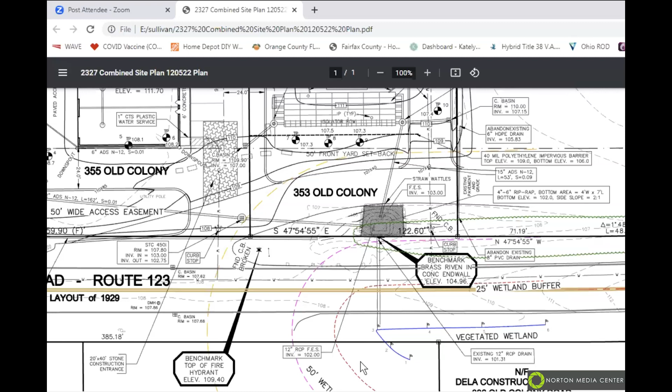Where are we on Route 123? So we're on 123, just beyond the north and south Worcester Street intersection, heading toward Attleboro. You go over the hill and it's to your right. Oh, where the buses are parked? Where the buses were parked, yes, this is the lot where the buses were parked.

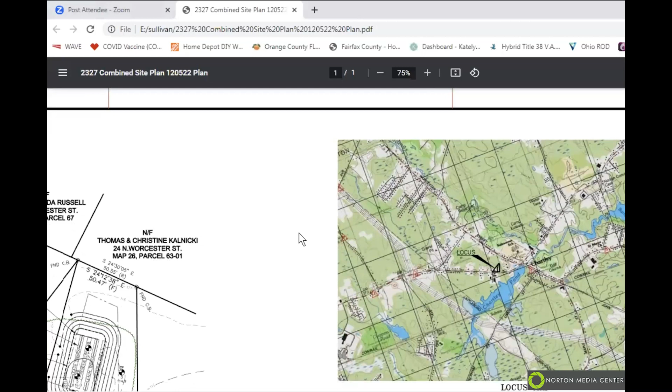And just so the commission understands, for context, this project is being peer reviewed by the planning board, and they have contracted with a stormwater consultant to peer review this project for the planning board. They have actively submitted a stormwater permit to the Stormwater Authority, which I will be reviewing, but I'm just waiting to get the final consensus from the peer review consultant before that permit's issued.

We have not been before a planning board yet. Thank you, Ron. And like Ron said, he has explained the full stormwater management report that we submitted, which is going to be reviewed under the purview of site plan approval with the planning board.

But John, just for clarification, we can close based on this plan since we're not doing the primary stormwater review here, is that correct? That is correct. Yes, all the onus would be on the applicant going through the planning board to make sure they're in compliance with the stormwater regulations.

Well, you might just want to keep it open. If the planning board process and peer review process results in comments that end up revising the site plan, I would suggest leaving it open so you don't have to come back to us. But it's up to you.

Well, as a comment to the applicant's representative, it really wouldn't matter if it stays open since you can't proceed with the project until the planning board signs off anyway. Is that so? Would the representative of the applicant be concerned if we just held in abeyance for a little bit?

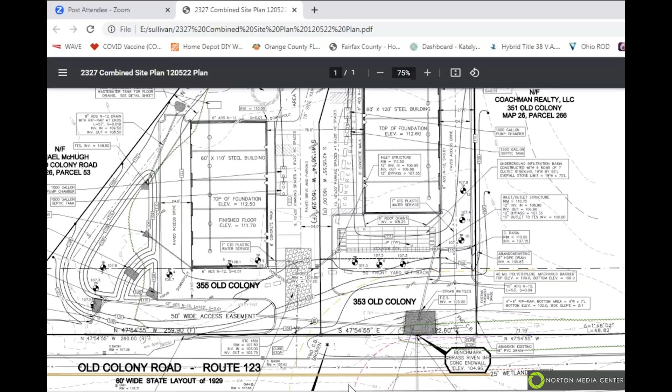I had a quick question. I was looking at the storm water management section, and this may not be in our purview, but I thought it said it was done in development with Easton's stormwater regulations on the objective, on page 3.

I'm guessing that's an oversight. Okay, that's all right, a find and replace can easily fix that. My apologies, no worries. I just wanted to make sure.

You wanted to make sure Easton hadn't held a revolution somewhere. And you just never know. True.

All right, if there are no further questions on this, I think we can entertain a motion for continuation of this hearing. Your planning board appointment is soon, is that correct? Yes sir, that is next Tuesday night. So if we schedule you for our next meeting, which is the 23rd of this month, presumably we'll have enough information to just close and go with that.

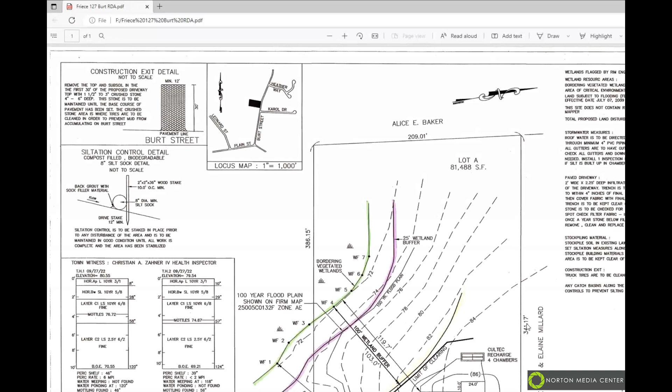Good evening, this is Craig Skanowski, RIM Engineering, representing the applicant and now the owner of the property, Bill Friece. So I can share screen. Where's it at? You all see that? We do, I do, okay.

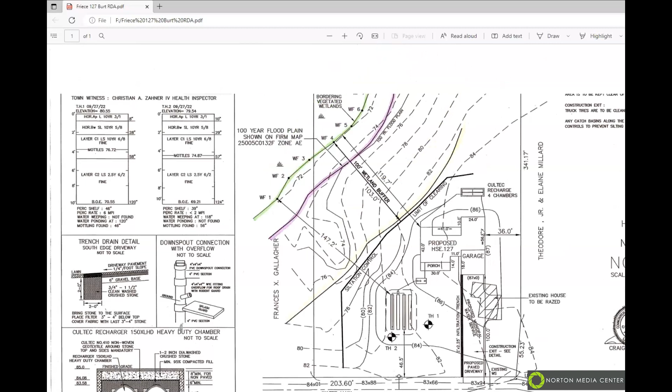So 127 Burt Street is an existing wooded property that was originally owned by the people to the east, the Millards, who broke out this lot back in the 80s. There's a small 720 square foot structure sitting just off, in a lawn area next to their property, that's to be razed, and we're proposing to construct this house for Mr. Friece. We flagged the wetlands here, the bordering vegetated wetlands.

We have a 100-foot buffer zone. There's also a 100-year floodplain that runs around 74.5 down on the slope here, following this bubble in the contouring. So our closest point of construction is 103 feet, which would be the limit of clearing, and our proposed house corner would be 119.7.

We did have an approved perk witnessed by the Board of Health agents, so we have a septic system designed 147 feet from BVW with the grading at about 110 feet. Assuming that the wetlands line was approved as shown, we're just asking for a request for determination of applicability, negative determination. Do you have any questions?

I should say for the roof water, we're putting it into Cultec chambers behind the house. And then along the driveway, we're directing the runoff into an infiltration trench that'll run on the westerly side, so we'll pitch it from the east to the west into a stone-lined trench.

Well, so by your illustration, pretty much all the construction is out of the buffer zone, and the only thing is your limit of clearing seems to bump right up against it, and that's it. Is that right? Yeah, we're about 103 feet from the wetlands with our limit of clearing, assuming that John approved the wetlands flags, then that's where we would be.

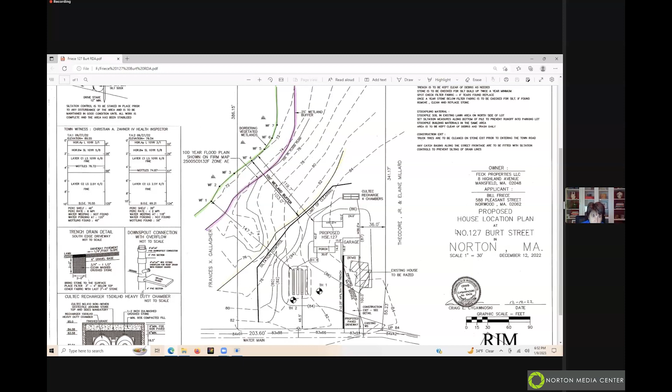Questions from anybody? Craig, I just had a quick question relative to the flood zone elevation. Is there a note on your plan that references the elevation? If not, I have no problem with it, if you can just add it to the call out. There is a line there labeled the 100-year.

Yeah, but typically, when you have an AE with this elevation assigned to it, you want to write that elevation down instead of somebody trying to guess what it is someday, that's all. So I guess the suggestion would be that the item addressed in the notes section say land subject to flooding, FEMA zone AE. I would put in elevation, parentheses, elevation.

74.5. I mean, it is an RDA, so we want to make sure that that's clear. Okay, thank you.

Any other questions? Seeing or hearing none, I think we can consider a motion to close and then a quick motion possibly for a negative determination. I'll make a motion to close the public hearing for DET file 1131 at 127 Burt Street.

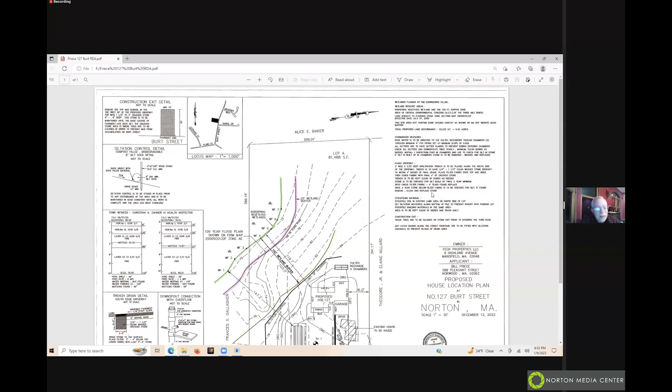Second. Sorry, Dan, you missed again. That was Ron who got the second and Lisa got the first. So roll call vote starting with Ron and Tama, aye. Aye. Mark and Lisa, aye. Dan? Aye. And I'll throw in an aye.

So the motion carries. We're back in our regular meeting. We can entertain a motion for either a negative or, if you think, positive determination. Dan, this is your moment.

I'll make a motion to issue a negative-3, pending the flood zone elevation added to the plan for DET 1131. A motion for negative-3 with the suggested modifications, seconded by... second. I think, well, all right.

I'm afraid Ron beat you again, Dan. Quite all right. Again, roll call vote starting with Tama and Ron. Aye, aye. And Mark and Lisa, aye, aye. Dan? Aye. And I'll throw in an aye. So the motion carries, negative determination.

Craig, thank you. Thank you. Next item on the agenda is item C, notice of intent, file number 250-1119, 0 South Washington Street. Do we have a representative of that project?

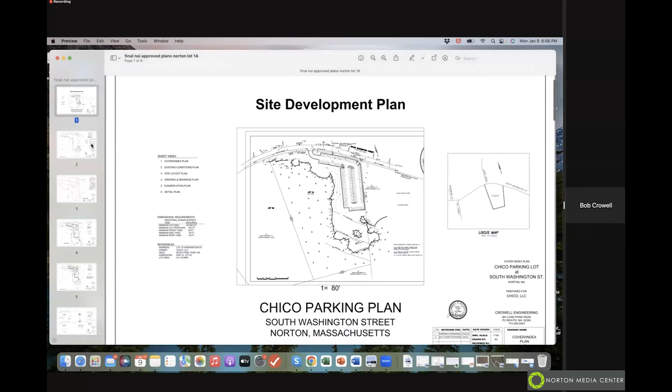It kind of shows the whole lot, it's the eight... okay, there's the existing conditions plan. It shows the wetland line. The lot, the dry area looks like the state of Florida, so on the left, upper left, it looks like the panhandle and then it goes down. Yeah, so that's what we have.

We have a 25-foot no-touch, okay, right, let's see, which is right here. Yeah, so there's a 25-foot no-touch and all of the grading is outside of that area. And we have approximately 150 parking spots. It's going to be a parking lot, and Dave has a contract if it gets approved with Amazon.

The stormwater is handled in two areas. There's three sets of catch basins and they all go to infiltration areas. It's all infiltrated, there's no runoff going into the wetlands. This has gone through the review engineer, Patrick at Amory Engineering, he reviewed it and we're all good. He also looked at the mounding calculations and we're good with that. In the area, it's 78 feet to ledge, so the mounding is not a problem.

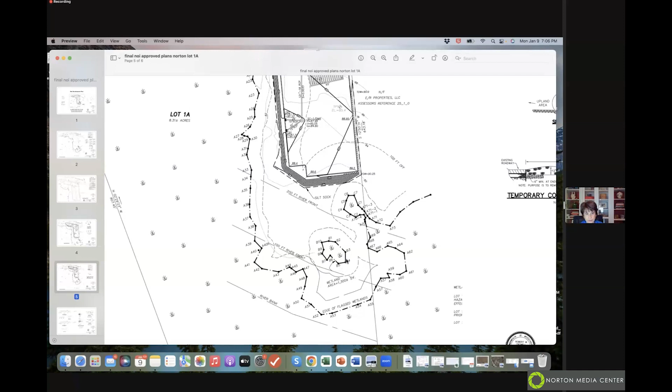I would want to see the river mean annual flag identification locations, and then if you're going to qualify wetland B as an IVW, that's how it should be labeled. Right now it just says wetland area, which doesn't really tell me what it is. Okay, we can make those plan changes.

And then, I assume, I shouldn't assume - is there a flood zone or anything on this site? It's not in a flood zone. And there's a note on existing, let's see.

Somewhere here - we probably should have backed up - but where is this on South Washington Street? There's no context right now. I'm trying to move it so all the people's faces aren't on it. There's the locus.

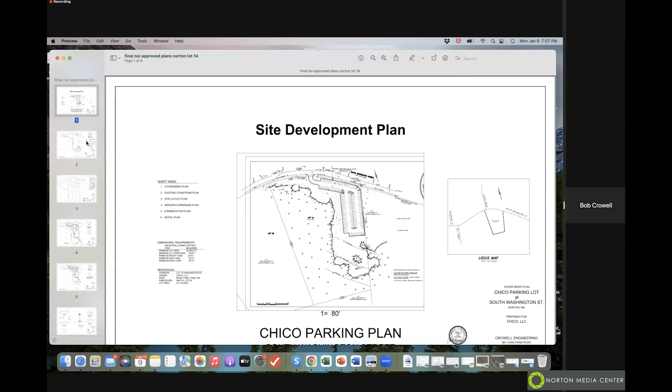The project is opposite of Lopes Drive. Lopes Drive is close to the left here, the left property line. The Lopes Drive label is right where my cursor is. Actually no, it's not - oh, here it is, I'm sorry. It had been mislabeled before, and I changed it. Thank you, that's all I had.

Any other questions from commission members or the audience about this?

I gotta say, whoever's speaking, it's not really understandable. I don't know where the sounds are coming from, but it's not a voice. So this is the computer that has the name Miles Devine attached to it. I'm sorry, you're gonna have to call into the number because your connection is horrible, not working. Sorry, whoever's trying to speak, you need to be on the agenda. If you call into the main line that's on there, there's no way we can hear you the way that you're doing this right now. So I'm gonna either kick you or you have to mute, please. Thank you.

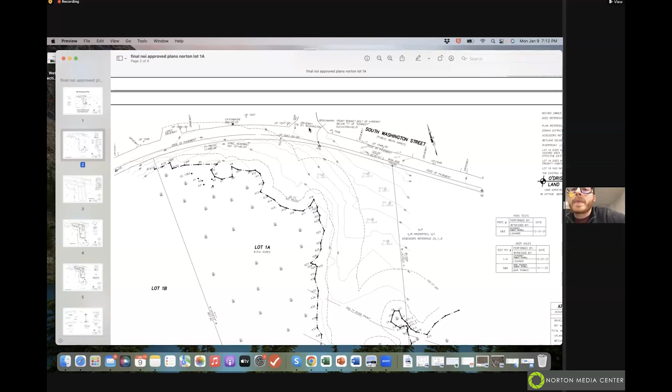Okay, so the entrance to this parking lot is going to be to the right of Lopes Drive, that road that's there. Right here's the entrance. This is 176 South Washington, and Lopes Drive is right here.

Just wanted to make sure of that, because my understanding is that the parking lot is going to be closer to my house than what this plan is showing. And I was also a little confused about where you're moving it - closer to Lopes Drive, or farther away?

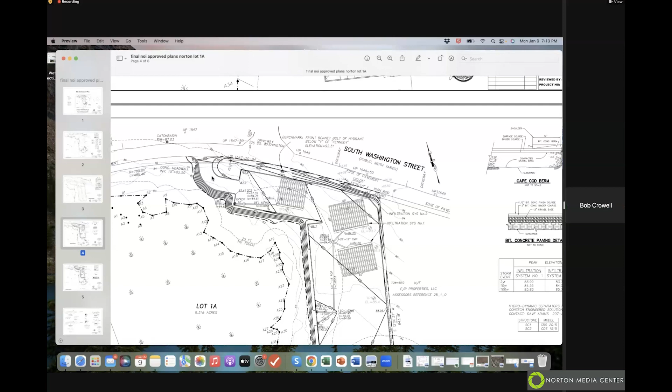No, the entrance is going to stay right where it is. What we're doing is they want a 20-foot landscape buffer, so my plan is just going to be moving down the page. We're moving it, but the entrance doesn't change. Most of the lot stays the same, the lower part doesn't move. All the drainage, the infiltration staying right where it is. We're just shifting around the paved area a little bit.

All right, any other questions? Looks like we have a question from Tracy Del Grosso. Hi, yes, Tracy Del Grosso, I live at 172 South Washington Street. I also had a few questions on these plans.

So if you look at the map, you can see where it says the iron rod is found. If you look at the outer right edge and follow that across the street, that would bring us to where the cemetery is, because I've dug there to plant things and there's that big red iron rod. Just to the left of that is my driveway. And where 176 South Washington is, that's Lopes Drive, legit Lopes Drive. So where the other Lopes Drive is labeled, I feel like that is mismarked.

No, if you change that, Bob, that's the way it is - Lopes Drive is to the left, and to the right is that place with a sign for the cabinet manufacturer. So literally my driveway is like right where the S is in South Washington.

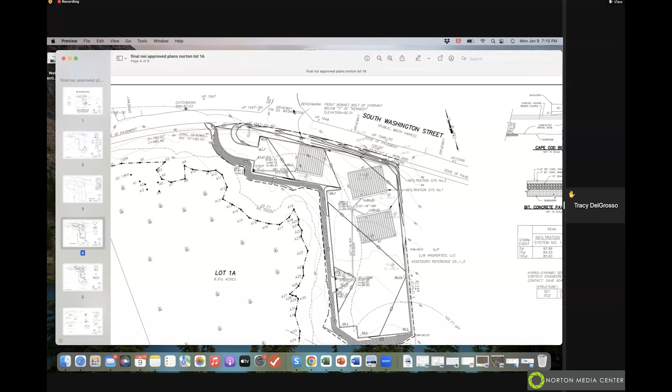So I'm not sure where this other Lopes Drive is labeled, I don't know what house that is. I actually have the assessor's map up. Yeah, that's something to look at. What I'll do is stop your sharing and share my screen, so everybody can see what our assessor's department has. Just give me one second. Can everyone see the screen?

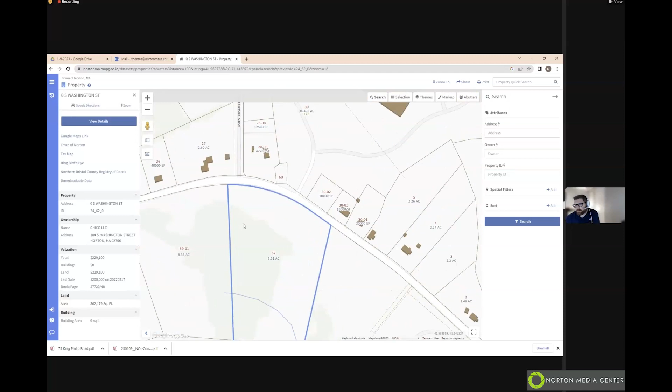Yep, we can. All right, so here's where the applicant is proposing the project. Here's Lopes Drive on the left-hand corner here. Can actually throw on the aerial too to make it easier. This is that huge warehouse project for 176 South Washington. So to give everybody clarity, Lopes Drive is on the furthest left-hand side here, 176 is in the middle, and on the right this property is 180 South Washington Street.

And number 60 is the cemetery, I believe. Which one's the cemetery, Dave? 60, I believe, this one right here. Is that the cemetery? Yes, this is the cemetery, then the town of Norton owns this piece right here. Just to give everybody a little bit more clarity.

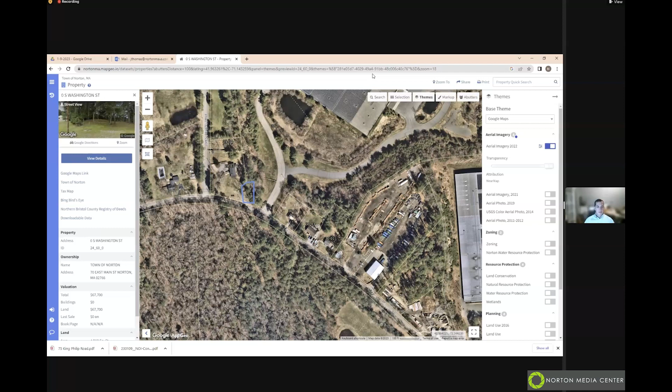Just not to belabor the point, but there are differences between the plans that were included in our packet in terms of what's labeled Lopes Drive and what's not. When did you receive that package? Because we changed this just recently. I'll leave that for John. I'd have to double check to see when the most recent packet was submitted. The most recent plan should be on the drive that the commission got.

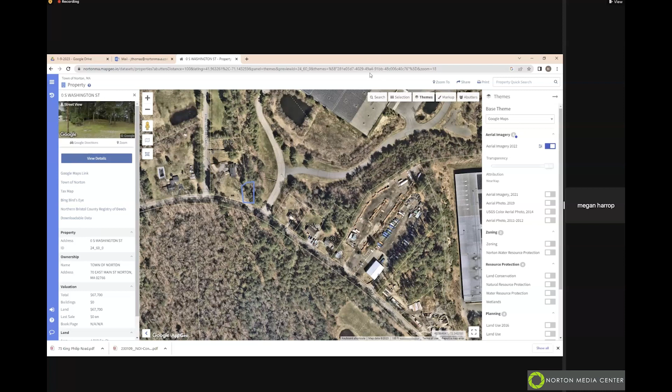The plan I'm looking at is dated 12/5 on the cover page, date issued 12/5. If we had a revision, it was on 12/29.

So it sounds like you guys have fixed it, but double checking might be reasonable. These really don't affect the project itself. Is that a fair statement? Correct.

Yeah, these are all site plan review things that need to be handled with the planning board. So I think they meet next Tuesday, the 17th. Any questions pertaining to the planning board or site plan review, if any abutters are concerned with the design outside of environmental, please feel free to attend that meeting.

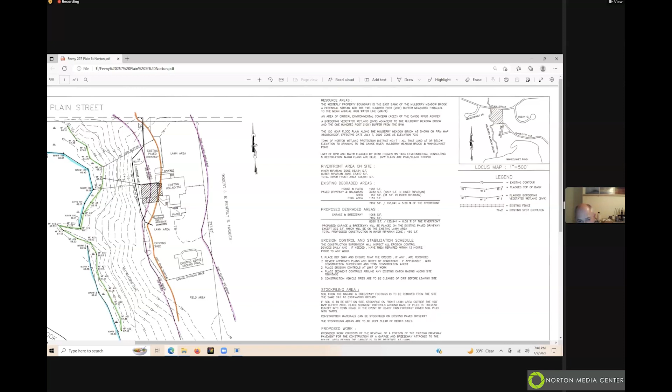Same thing over here. We have the pavement line, the utility pole here, so overhead comes to this and then goes to the house. So along here is minimal grass, and then the rest is heavily wooded, which will not be touched.

There aren't any trees that we're planning to take down. Again, the existing tree line is about 6 to 10 feet west of the existing driveway.

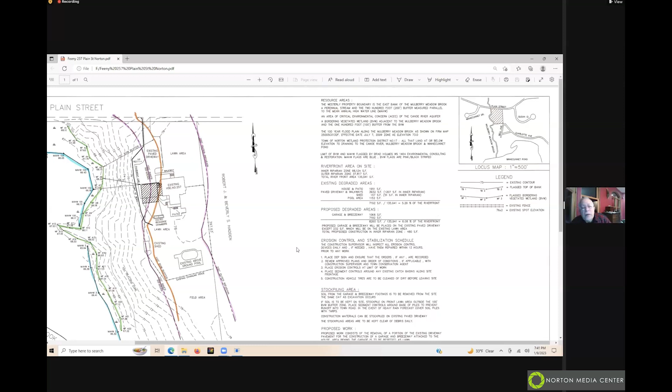Any questions from members of the commission? Any questions from the audience?

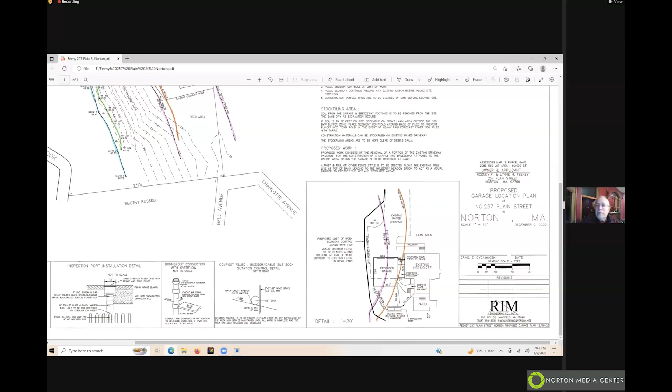It's my understanding that we pretty much have all the information, but John, maybe you can correct me. Is this suitable for closing tonight?

All right, unless there are further questions, I think we can consider a motion to close. I'll make a motion to close the public hearing for file 250-1120 at 257 Plain Street. Second. We have a motion by Lisa, seconded by Tama, to close the public hearing.

Roll call vote beginning with Tama and Mark. Aye. Aye. And Lisa and Dan. Aye. And Ron. Ron, you're up for a vote. Ron is frozen. Looks like Ron isn't hearing us, but I'll throw in my aye, and I guess we'll have to be happy with that.

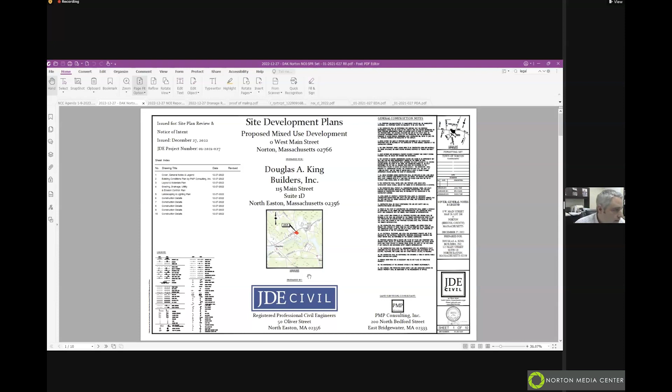All right, so this is 0 West Main Street, Map 21, lot 206. This is the existing conditions plan for the project. If you remember, this site was the same project that we had before you in August last year. I think it was the only live meeting you guys had for an RDA, regarding the drainage ditch right through here, which was determined through the RDA process to be an intermittent stream.

So I'll just go through my presentation here. The applicant, Douglas King Builders, is looking to obtain the necessary land permits to improve this piece of property on West Main Street in Norton.

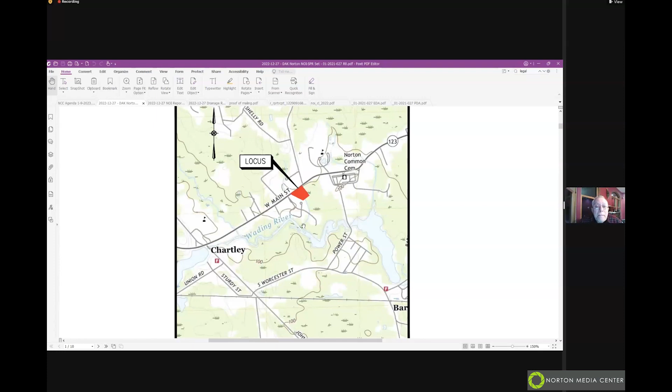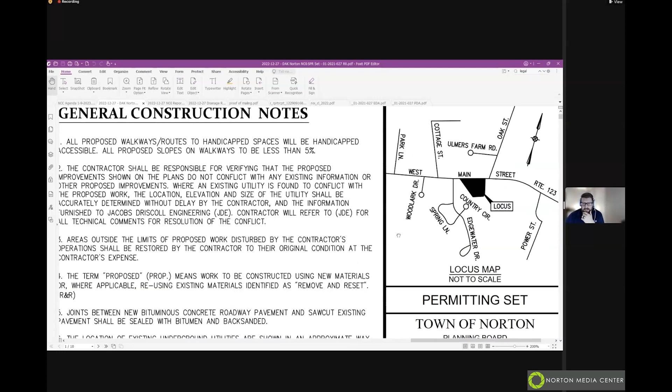They'd like to do... let me just interject. For those who wonder where on West Main Street, if you don't already know, Oak Street is just to the right of this project, where Oak Street meets 123. And I think that will orient people. Yeah. And back behind it are the condos, Edgemere... there we go, this is Edgewater, I think it is. Oak Street's labeled here, and Edgewater Drive. Yeah. All right, very good. Okay.

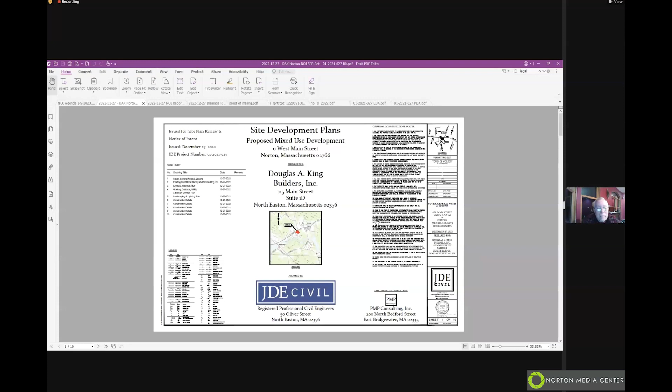All right, so the applicant is looking to construct a mixed-use building on the property. It's going to be a 4,000 square foot building, 2 stories. On the first floor, a dentist office, and on the second floor, 4 apartments. Site's located in the Village Commercial District on the southern side of West Main Street. Surrounding uses include residential homes to the north, west, and southern sides. Church and the middle school are to the east, and also a bank. And the parcel is identified as map 21, lot 206.

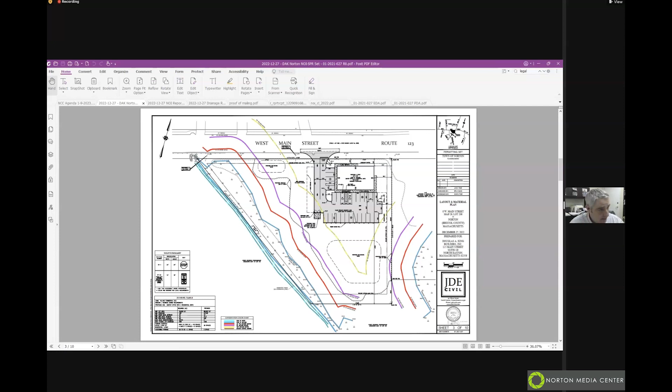So as I noted, the project is for this proposed building right here, 4,000 square feet. There'll be proposed parking to the rear and side, 28 parking spaces as required by zoning. Move on to the drainage plan.

This area over here is reserved for a proposed septic system. We tried to fit it under the parking lot, but it was going to cause us to raise it too much and have too much of a slope coming down through the existing road. So the next step is for us to complete design plans for the septic system and submit that to Board of Health, which we might have to go back out and do more soil testing. But we're aware of that.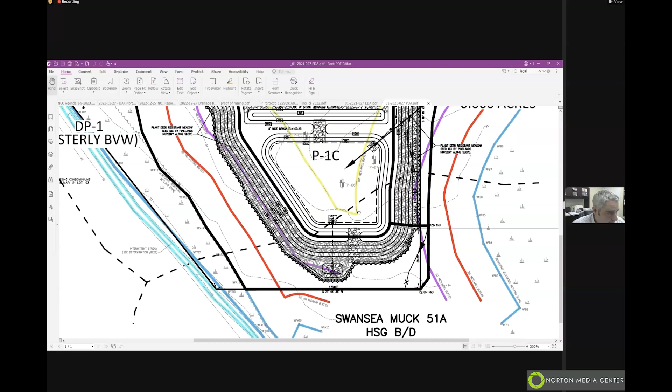The way that this drainage basin is designed, we're infiltrating all the water. This isn't an outlet control structure. This right here is actually a drawdown pipe with a valve in the bank that's normally closed, so it doesn't normally have water flowing through it. That's only for maintenance purposes and emergency spillway. So we are infiltrating all of the water that comes off in this basin as well. Same thing, there's no outlet structure. There is an overflow for emergency spillway. We have 1 foot of freeboard designed to both basins. I believe this one has more than a foot.

So this area that's hatched along here is proposed to be, it's called out on here, a deer-resistant meadow seed mix. So what happens with soils that are too good, sandy soils and A soils, even if we're not paving this area, it's just grading from the basin down. And if it was to be lawn, that's enough of a change in cover type that would increase the runoff. So we're looking to replicate the type of runoff characteristics of the existing wooded area by planting this meadow mix along the outer edge of the stormwater basin up to about this point.

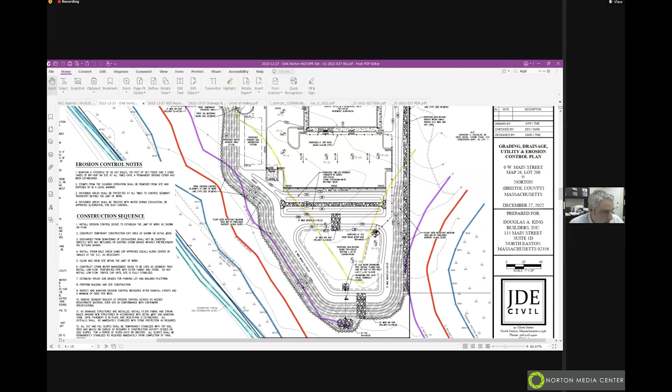Also forgot to mention there is a sod strip and a flush curb along here to make sure that the edge of the pavement doesn't get broken off or anything. So there's a concrete curb set flush and then a 5 foot wide sod strip prior to the 2 sediment forebays in series. We're also putting the roof drains under the ground and discharging those directly into the basin here, and again, this is all going to infiltrate into the ground.

And then we have public utilities coming, the water's coming through here and the gas and electric will come off of the pole on the side of the street. So we also have a construction entrance proposed, or construction exit, to make sure no sediment is tracked out onto the road during construction. We're also showing a dewatering area and temporary stockpile areas outside of the 100 foot buffer.

That is the overview of the project.

John, if you had anything, or... Yeah, I just want to inform the commission that we did retain a peer review consultant for this, for the stormwater, so they'll be looking at that. And they'll probably have some comments pertaining to the basin that's closest to that potential vernal pool, so there may need to be some tweaks made in anticipation of that. So, you know, that was something that we had a discussion about after all this work was done that Greg generated. So there will probably be some refinements that they'll come back with, along with the peer reviewer's comments.

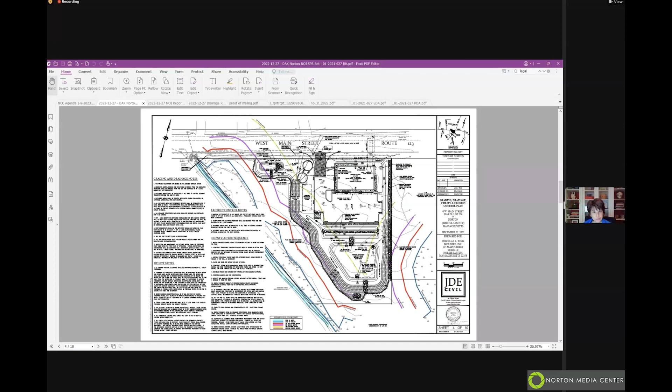So I just have a couple of questions. What are you using for sediment controls along the perimeter? For the paved area, this is all going to run overland into these two sediment forebays.

No, I'm sorry, I'm talking construction term, sediment control. Oh, I'm sorry, yeah. So it looks like you may have, well, it should be proposed sediment control. So it looks like a filter mitt. Yes, are you showing a compost filled filter sock? Yep.

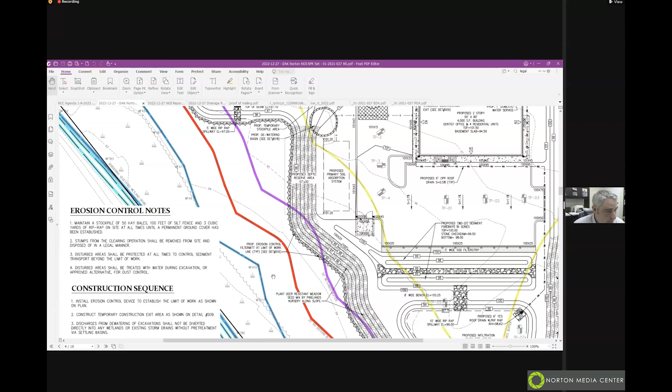So the first note under your erosion controls talks about hay bales. If you could please strike hay bales from every note and every detail—straw bales too—they're no longer allowed. I just want to make sure those aren't introduced, and I assume you have a detail of that filter mitt somewhere? I do.

This is it—it's a compost filled filter sock. Okay, that's sediment control, by the way, just so you know. Not erosion control, but you might want to fix your detail.

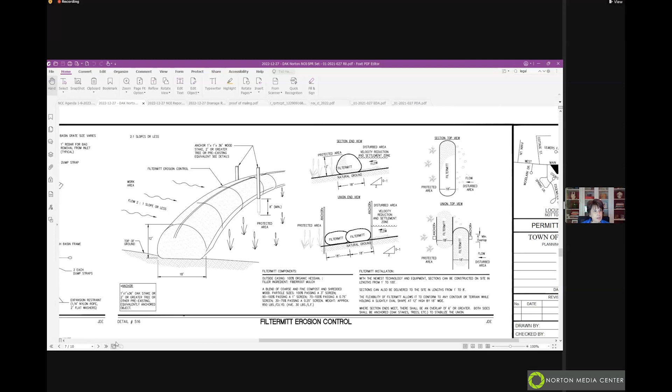The next question I had was a general question about Pond 1A, if we could go back to that. Is there any reason—I mean it's 90 degrees to the street—but is there any reason you couldn't put it at 45 degrees and not cut into the buffer so much?

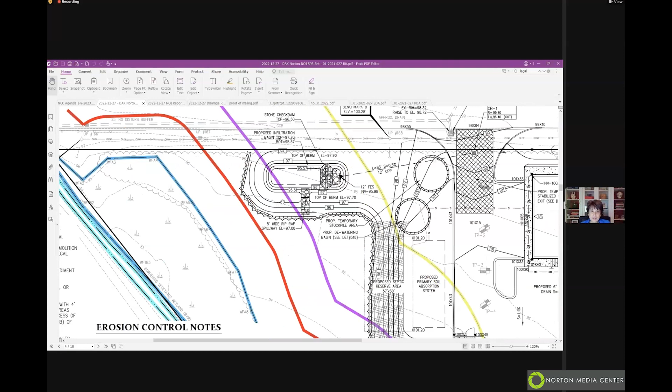So if you go to the grading plan for a second. Yep, yeah, oh I see what you're saying—rotate it out, try to get it out of the 50. Yeah, I know the engineers like everything at 90 degrees, but sometimes you can think outside the box and say how does this fit with the landscape a little better in the topo, which would be 45 degrees almost.

Now, if there's an issue with distance from your soil absorption system, that's another issue, but I don't know. Yeah, now that you mentioned that, I kind of have it—it's going to have to come out 50 feet from the wetland regardless to meet the stormwater handbook standards. So that's just a comment the peer reviewer is probably going to put on there. Okay.

I think that was all I had, you know, as long as this is being peer reviewed for stormwater. I had the same concerns about the PVP, even though there's not a direct point source, but for somebody to look at the standards. That's all I had, thank you.

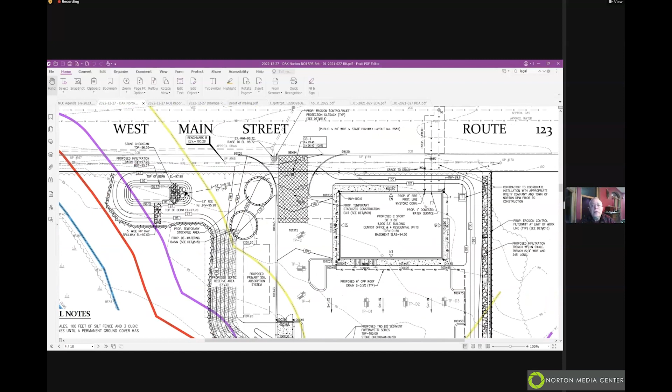All right, anyone else on the commission have comments or questions? If not, we can go—Kelly Murphy, did you have a comment? Freddie Bay, Annie Schuster as well? So Kelly, you put your hand up quickly—I see it's down now, again.

Thank you, I just had a couple of questions I wanted to clarify. It looks like the total buffer has three different buffer zones—a 25, a 50, and a 100. I just wanted to confirm that was correct, and then I was curious, so that would be a total of 175 feet of buffer zone.

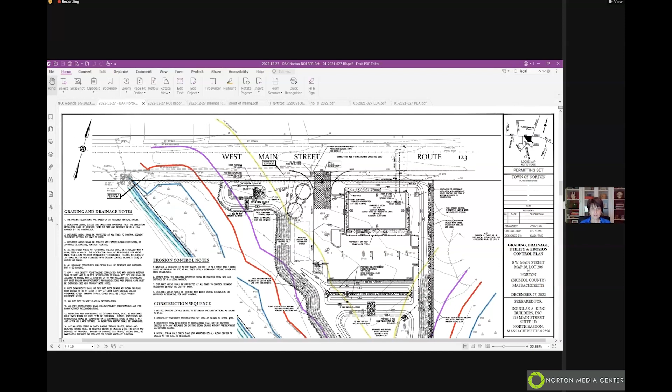There's really no 50 foot, I don't know where that's coming from. So the 50 foot's there for compliance with the stormwater handbook.

So there are three buffer zones that total 175. No, there's a 100-foot buffer zone, and then there's some interior buffer zones, and these all originate from where the wetlands are delineated.

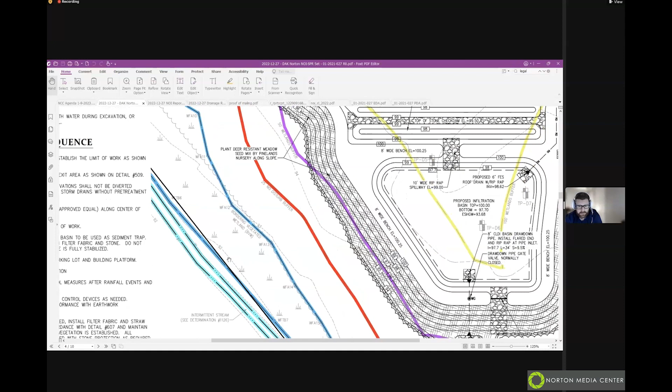You'll see flag numbers that say WF dash with a number. Those are where the mapped resource areas for the wetlands are associated with that drainage ditch, and you derive a horizontal buffer outwards from there, and that goes 25, 50, and 100. The jurisdiction of the Conservation Commission is within 100 feet of that mapped wetland.

So the buffer between that property line - I didn't identify myself, I'm a trustee for the River Crossing condominiums, part of the Edgewater Drive, Spring Lane area. I'm thinking the water line is sort of the property line, I think it goes down where that little river is. Yeah, the stream and drainage way meanders the property line from what I recall.

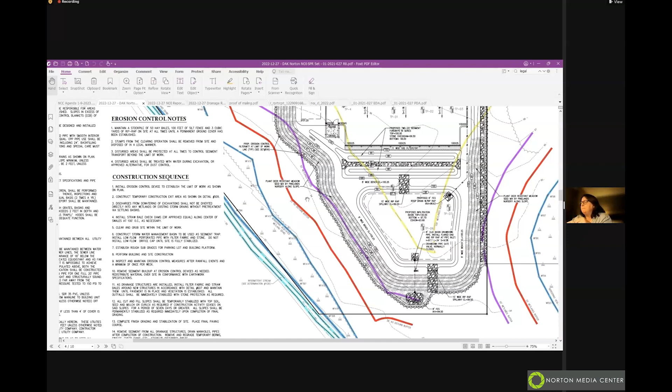So there's about a 100-foot buffer between our property lines because of the natural water line? If that's what you want to say, then there would be a 100-foot buffer in either direction - towards the Edgewater development, and towards this project.

And then the basin, I don't know how deep it's going to be and if there's going to be any kind of railing around it for safety? It's not required. That's a no? No, unless the commission may require it, but as far as stormwater management goes and the Wetlands Protection Act, it's not required. And how deep is it? It is just over 2 feet.

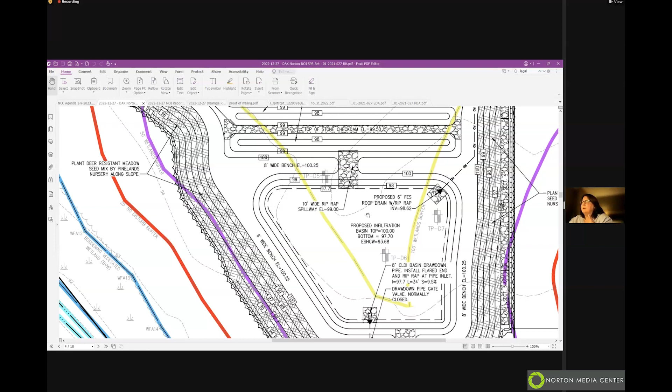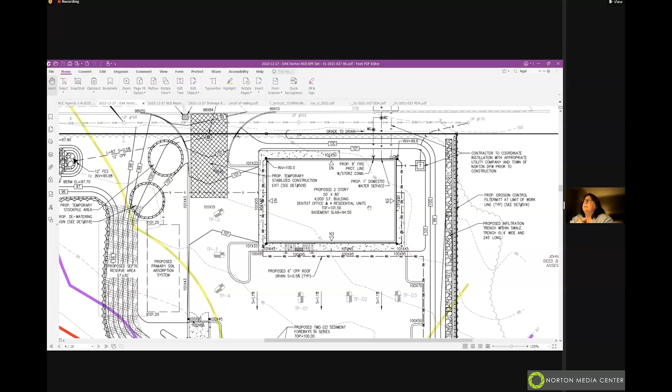Can you also expand a little bit on the use of the building? I see that it says dentist office. So when it says mixed use, is it only one tenant type thing? Is it a dentist office and something else, or is it just one thing? It's going to be a dentist office on the first floor, and then 4 residential units on the second floor. Okay. And is the dentist office a done deal, or could it turn into something else?

They have an agreement on the land, subject to getting the permits. Okay, that's all I have. Thank you, all right, very good.

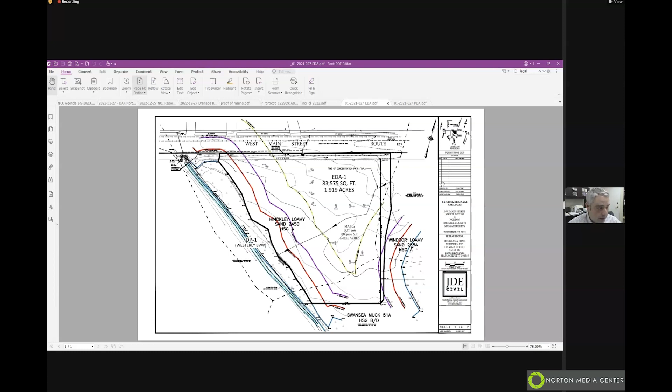One of those is that we need to study the site, and these are the existing drainage areas, so I delineate these areas and run a hydraulic model on this property the way it is currently. And that's the set number for the future development. So I can't send any more water off the site than currently comes off of it today. A lot of times we end up reducing the amount of water that comes off of a site, and that's what we're doing in this situation.

Well, that could be equally as dangerous, for the poor little critters that live in that water.

We are surrounded by water here and we love it. But my other question is, is this whole property going to be clear cut? Are our neighbors going to be looking at a big commercial building from their back porches? Or are you going to leave a row of trees or replant some trees to create some kind of buffer?

Yeah, so the limit of clearing is this tree line that's right in here as proposed. We can't clear past this 25-foot no-touch line that is required per the local Norton requirements. But we're not going that far in most cases, right up through here. And we will revegetate this with some meadow mix type plantings.

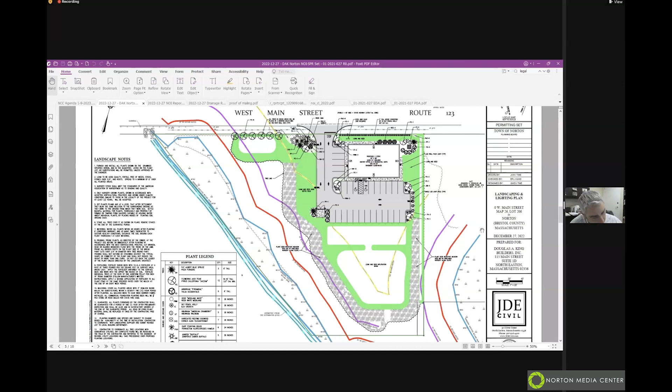What does that mean, meadow, like deer resistant meadow mix? It's a seed mixture, included in the drainage report, of different plant types that grow and create a meadow. It's not meant to be mowed, it'll just grow wild. And there's a list of the plants included in that mix within the stormwater management report.

That's public information. You can get a copy from the Conservation Commission office. And we're also proposing all this landscaping as shown on this plan here. That'll be discussed in further detail when we go to the planning board for site plan approval.

Okay, yeah, because we do have a lot of wildlife in our neighborhood, like walking right in the streets. So we just kind of want to make sure that they're not displaced. Yeah. Thank you. You're welcome.

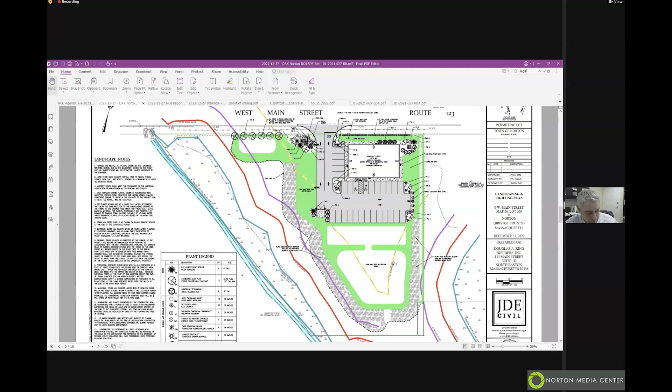All right, I don't know. Anyone else have a question? I think Freddie Fay Moskowitz had a question. Yes, hi, thank you. You go ahead. Thank you, Edgewater Drive.

I wondered about the parking lot and the lighting. How tall and how often will it be on? Can you talk about the planning board issue? Yes, so that is going to be a planning board issue. Now Greg, I believe you guys are going to be going in front of the planning board, is that correct? Yes, we have to go in front of planning for site plan review.

So when are you planning to go, next Tuesday? Is that the intent? We haven't filed with them yet. We want to get through at least a peer review with you guys to see what might need to be revised, and then bring a revised plan to both your commission and planning board on the next go around.

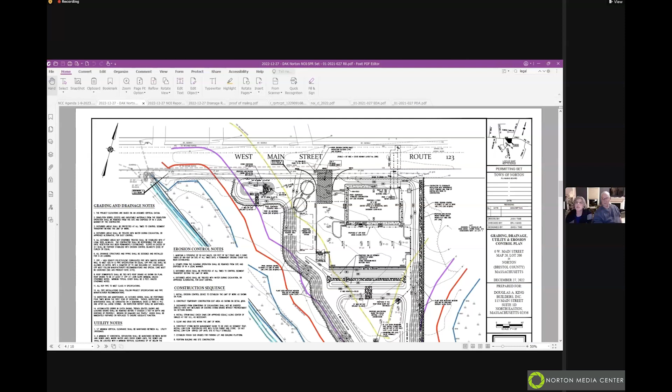But briefly, we will have a lighting design prepared by a lighting vendor, and typically there is required zero light pollution or spillover at the property line. So I don't expect that the parking lot out towards your development will be lit. We're not going to light up the stormwater basin or anything. That's going to be an area that's going to be kept dark.

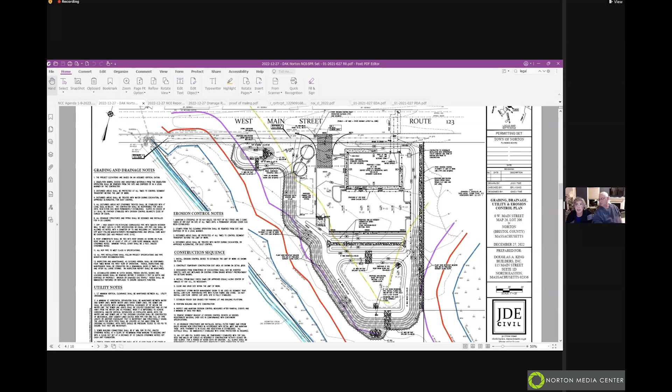And just about trees, you said you weren't cutting any trees down, correct? Well, we will have to clear the area for the proposed development. So, trees being very important for the environment, and we already have some, I wouldn't say flooding, but overflow of water in our development.

Is there any chance for a tree for tree, or maybe 2 trees for 1, to give back? It wouldn't have to be in this area, it could be anywhere in Norton, but to consider the trees. Is that a planning board issue? The town doesn't currently have those stipulations or regulations. Other towns may, but I'm just talking about doing right, and the National Audubon Society actually funds planting of trees and helps pay for this.

I would address that with the planning board. Okay, thank you. You're welcome. Thank you very much.

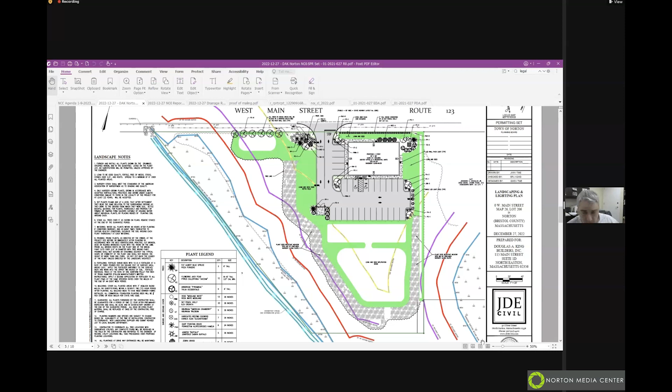All right, so I think we can consider a motion for continuing this, and our next meeting is the 23rd. I'm assuming, Greg, that that's acceptable. I know everything may not be wrapped up by then, but yeah, we'll continue to the 23rd, and if we need more time, we can always ask for a continuance. All right, very good, so looking for a motion for continuation.

I'll make a motion to continue the public hearing for 0 West Main Street, map 28, parcel 206, to January 23rd public hearing. Motion made by Lisa and seconded by Dan. Roll call vote, starting with Ron and Lisa. Aye. Aye. Mark and Tama. Aye. Aye. And Dan. Aye. And I'll throw in an aye, so the motion carries.

I'm assuming we'll see you on the 23rd, Greg. Thank you. Thank you. Have a good night, everyone. You bet. Aye.

Next item, that completes our new hearings. Next item is file number 250-1105, notice of intent, Pine Street cluster.

So we have a representative for the applicant. Yes, Claire Hogeboom with LEC Environmental Consultants representing the applicant.

So maybe you could just quickly summarize what was outstanding. I know there were a couple of reviews that had to be completed, but maybe you can help bring us up to date. Sure, I'll share my screen. I have the revised plans up on my screen.

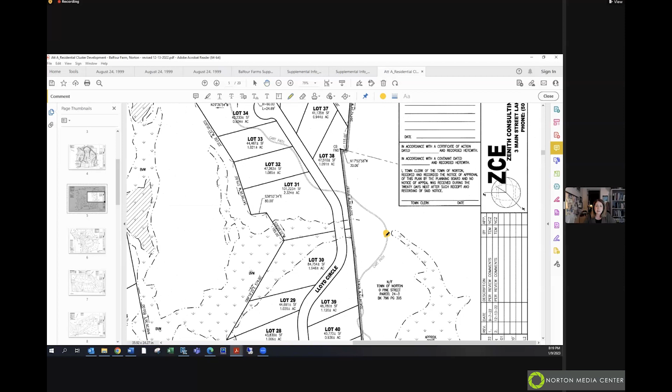I believe John had mentioned it was from around 1919 or 1914, something along those lines. It's a pretty old culvert, and at this point it's elevated vertically above where the stream bed or wetland bed would be. It's clearly undersized.

One consideration might be, and we'll leave this to the commission's discretion, to have the applicant assist the town—again dependent on whether the town wishes to do this—in perhaps designing and replacing this culvert with something more open that would allow for more free flow through this area. I believe that's really up to the commission and the town for discussion, but that was one of the other mitigating measures we thought we found.

If the commission chose to go that route, our recommendation would be that it be a separate filing altogether, perhaps linked by DEP file number to this project, and have this project linked to that potential project in an administrative record-keeping manner, but otherwise be a separate project. I think that's about it for me, so I can turn it back to the commission for questions and comments.

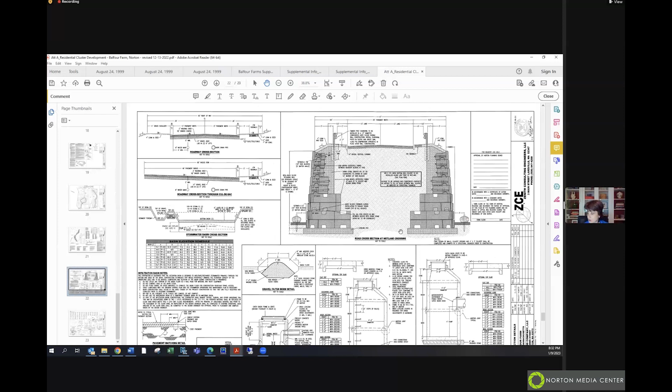I just had one other quick comment. I noticed on the box culvert design, it said to be designed by a structural. So John Thomas, we just want to probably include a condition that says that the structural will provide those plans for our files. Okay, definitely do that. Okay, yeah, that makes sense to me.

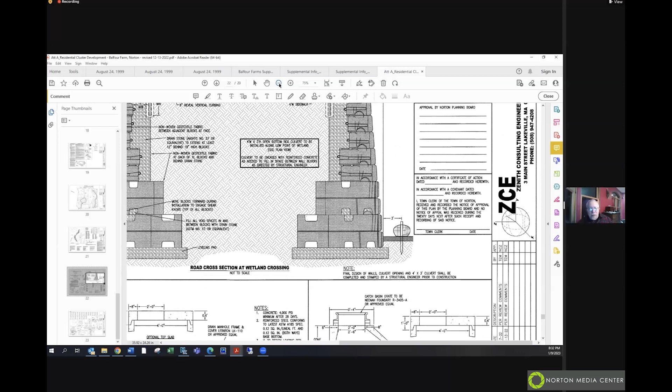That's all I had. All right, if there are no further questions, it brings us to the question of whether we're at the point with this to close. I'm gonna, it looks like we do have a couple of questions up here though. So why don't I deal with that, and then John, maybe you can consider advising me on that. So we have Ellen Turner, or a computer named Ellen Turner, with their hand up. So why don't you go ahead?

Hi, this is Fran Turner, actually, 145 Pine Street. I just wanted to add some perspective to the conversation about the water flow through that 12-inch pipe. I live at 145, so we've got some of the water that flows. I actually wasn't aware of this until fairly recently. That water that flows through the 12-inch pipe that's going to go through the box culvert, ultimately, if I'm correct, ends up at the water area around 148 and then ultimately goes under the road and then by 145 Pine Street where we live. Just for perspective, over the last bunch of years, during the summer, the water gets very low. And frankly, I hadn't had a chance to kind of get out into the woods around there to understand why it is.

It seems like the root cause might be that 12-inch pipe that we're now talking about. I took a walk out there with one of my neighbors a little while ago, and I realized that clearly, if the water flow is through that 12-inch pipe, along across the trail, and then through this property, and ultimately that sounds like it could well be the root cause of the water getting very low over the course of the summer. And again, what happens is the water on the 148 side gets below the level of, whatever the level of the, I don't know what you call it, but the level of the water allowing it to flow under the road. And then our side, 145, goes down by quite a way once the water stops flowing in.

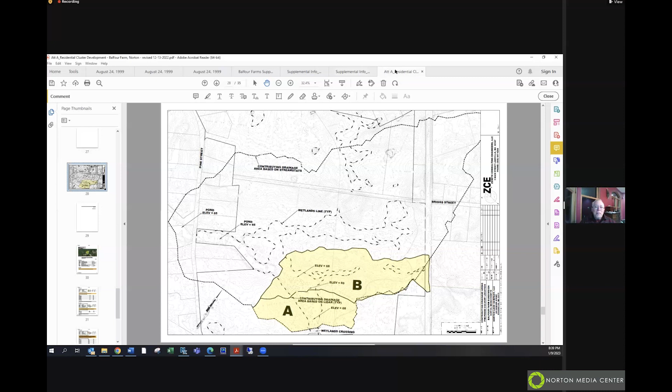But you're raising a very prickly issue, and that is, first, you don't necessarily have the right to prevent a landowner from doing what they wish with their land if it's consistent with all of the local regulations. And it's kind of like a thorny problem, because you're basically saying okay, we're going to deny people the opportunity that you've already had a chance to take advantage of, and that becomes an equality and a civil rights issue. And it's certainly not in the Wetlands Protection Act, so we can't do anything other than comment on it. But you've got to start with the legislature if you're going to make that happen. I don't know if that helps.

My position doesn't change, I would still be opposed. No, I understand, but I'm sure your position is generated from wanting the best for the town of Norton. That's right. Everybody has to have the same opportunity, and it's a very difficult and very complex discussion when you talk about stopping development. It's beyond my knowledge base, so I'll put it that way. No, I'm not saying stopping the development, although I know the folks would like that to happen, but I'm just saying they're talking about having them participate in the cost to fix it, that's all. Okay, well at the very least, that's probably a planning board discussion.

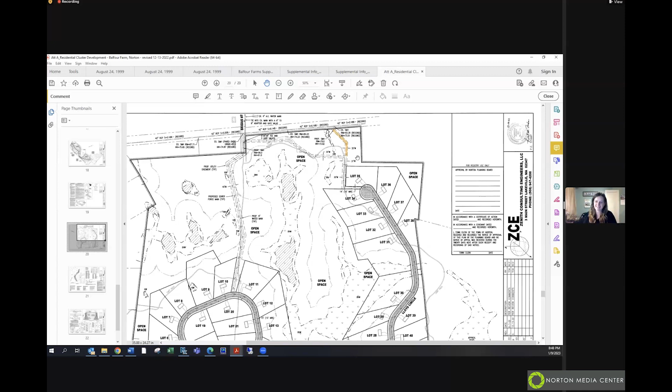Mr. Chairman, if I may, but we just have circumstance. Did you find anything? I just skimmed through Janet's letter from December 22nd. It sounds like all outstanding items from her stormwater peer review have been addressed, and there's no further comment at this point.

So I think a motion is in order? Maybe the bottom line is the commission feels comfortable closing this one because it's already been before planning and things are pretty settled. We're not going to see a change in position of the road, et cetera. So sure, I think we can entertain a motion to close.

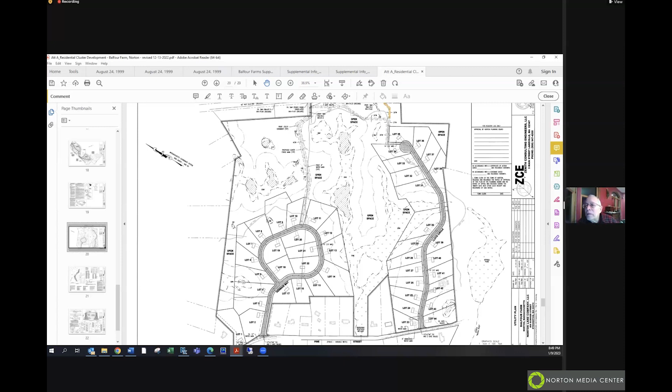I'll make a motion to close the public hearing for file 250-1105. I'll second. We have a motion made by Lisa and seconded by Tama for closing this public hearing. Roll call vote: Ron, aye. Tama, aye. Mark, aye. Lisa, aye. Dan, aye. I'll throw in an aye. So the motion carries. This hearing is closed, and John will have a great time producing an order of conditions for next time.

Thank you. Thank you all. I've already started working on it just to keep everybody in the loop. Well, we'll miss seeing you, Claire. I know, I'll miss you guys too. Thank you so much for a wonderful review. And Amy, I appreciate all your work on this, you did a great job with the peer review. Tom, John, same to you, it was really great to work through all these things with you. Appreciate everybody's time. Thank you.

All right, our next item on the agenda is 0 King Philip Road. Thank you guys for being patient, things have gone on and on tonight. Who's going to be speaking, is it Chris?

Yes, go ahead. Good evening. For the record, my name is Chris Lucas with Lucas Environmental, professional and certified wetland scientist and registered professional soil scientist. Hope you all had a great New Year and holiday. It's good to see you again. Hopefully we can wrap this up this evening.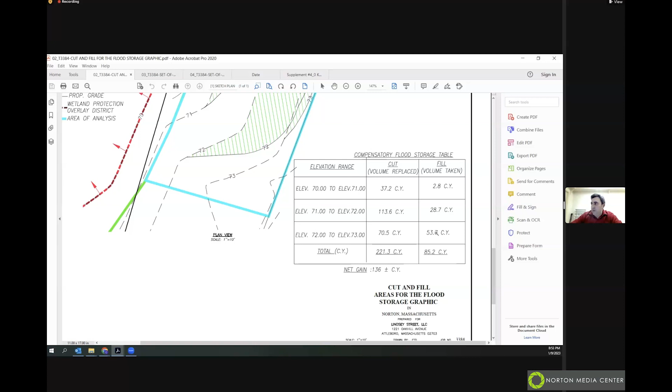We also have a nice graphic here so you can all see it visually. And the Advanced Concepts calculations and whatnot were provided with that letter.

Furthermore, I think this was a big concern from the commission. The basement was removed. There's no more basement associated with this house.

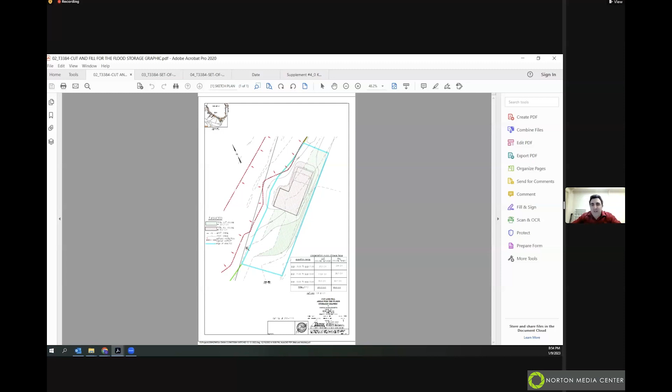What they've done now is proposed a 4 foot crawl space. This is FEMA compliant. Crawl spaces are allowed under structures as long as one side is at grade. And what we have done here is the back side, this entire back portion of the crawl space will be at final grade, so we are FEMA compliant with that.

So we're no longer using the house for compensatory storage as was requested. That graphic shows all the areas. We fully comply with it. And this cross section shows the crawl space now instead of a basement.

The only adjustment required, because we adjusted the flood compensatory storage, this area here along the back of the house is the previous limit of work. We are going to remain that as the permanent limit of work. However, we do need to grade into this area back here.

This was discussed with Mr. Thomas. He seemed to think that was acceptable. And what we've proposed here is a pretty robust restoration plan with trees and shrubs and seeding along the back. So this area will be restored upon completion and will no longer further be used.

So the same limit of work is here, but we had to regrade this to be able to provide the flood compensatory storage that's required.

We provided an updated mitigation table. Again, we think it's comparable for the work on the site, and I think we're providing reasonable and appropriate mitigation for the work proposed on the project. With that being said, we believe we are fully compliant with the floodplain regulations, and we've addressed the commission's concerns for this lot. And the team is happy here to answer any questions that you and the commission may have, and looking to close the hearing tonight. Thank you.

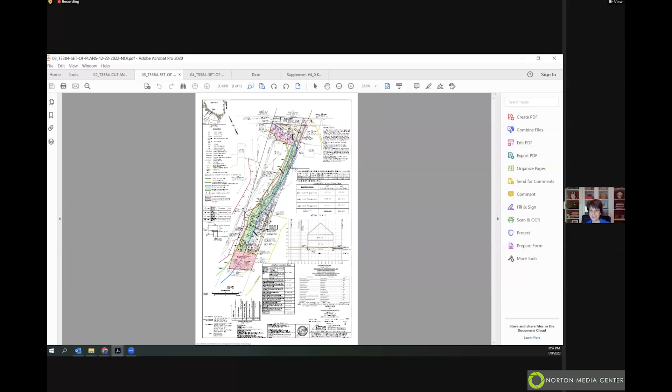Right, and then this disturbed area up front is going to be restored. And this area here will not be touched either. We've pulled back an area along the wetland edge here to avoid, this orange line is the revised erosion and sedimentation control line. So we'll be avoiding this area here as well.

So did DEP have any comments on this on their website? They originally had comments about the flood storage and the way that was being handled. We believe that this revised package completely addresses their questions.

Okay, and I assume you sent them a package? Tilton Associates sent this package concurrently to DEP when they sent it to the Conservation Commission. Okay, so they typically don't comment again, but they have the materials.

DEP typically doesn't comment a second time. Usually, in my experience, if they've had a significant concern that they may appeal something, then they usually reach out to the applicant. And they haven't reached out to you? They have not, so we're not concerned with that at this point.

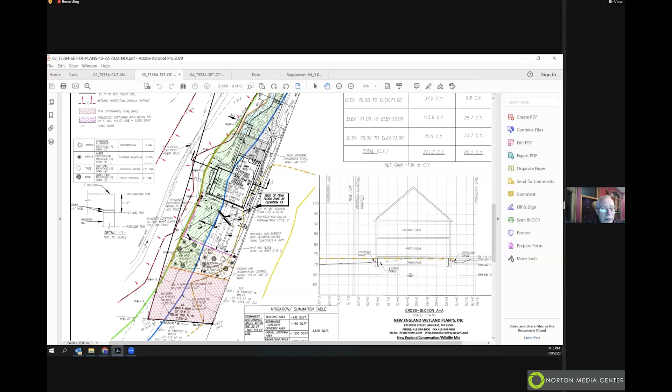All right, any further questions or comments? I think we could certainly open it up to the audience. And if there are none, it's my sense that all of the issues have been roasted over multiple times and that we're ready to close unless we have anything more to say.

The only comment I had is, and I'm going to refer to John Thomas, is if we should have a chat with DEP to see if they're satisfied. Because I personally think those comments need to be closed out like any other set of professional comments.

Okay, I didn't get the clarity of that statement. Things were a little fuzzy. Could you just repeat that? Sure, I think we need to get DEP's sign off on this, that they're okay with this design.

They had a number of comments on the initial design. The applicant said they've addressed them, but I would like to hear from DEP that they are satisfied and that the flood storage meets the performance standards. They had significant comments on the first application. So it's not closed, we need closure from DEP, and I think it's worth a call to them.

Would the applicant grant us a continuation to allow us to clarify these issues? Mr. Chairman, 2 points on that before the applicant speaks. One, most of DEP's comments were raised by Mr. Thomas about the floodplain, and he seems satisfied that we've addressed it.

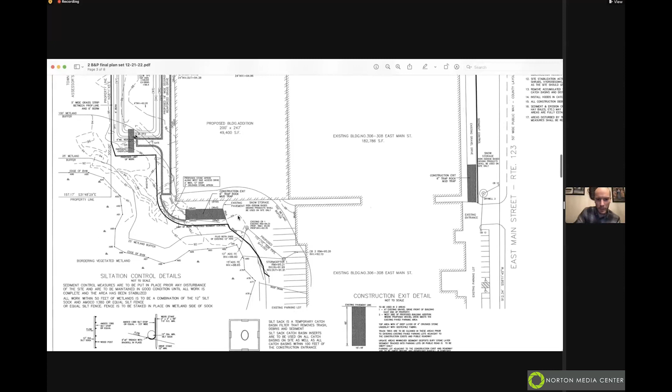So what we have proposed to do is take an existing catch basin. I'll pull up the plans so the commission can see this. We're taking an existing catch basin that's right here, which discharges directly to the wetlands. So we've decided to sever this pipe and run it into the Stormceptor, so it gets pre-treatment before it discharges.

Rather than installing another unit and digging up the parking lot to put a large unit in the ground, we're just going to use an existing unit which has the capacity to treat both catch basins. That way everything has one discharge point instead of two, and they're both in the same general area. So from a stormwater standpoint, you're getting much better treatment than under existing conditions. This area is also getting a smaller contribution area because there's less asphalt reaching this catch basin from the proposed project.

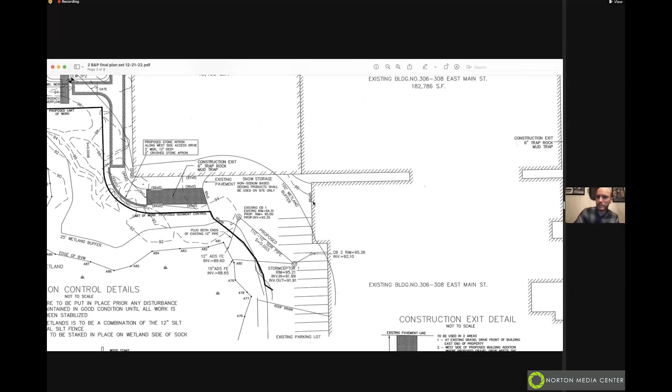All right, thank you very much for addressing that.

So my understanding from the peer reviewer and reading through their memo is that most of the stormwater concerns for the project have been addressed, if not all. Is that correct, Mark? Yeah, all of it addressed. There were some comments about conditions, which usually every peer review has, but nothing that required plans to be changed or stormwater calculations to be updated.

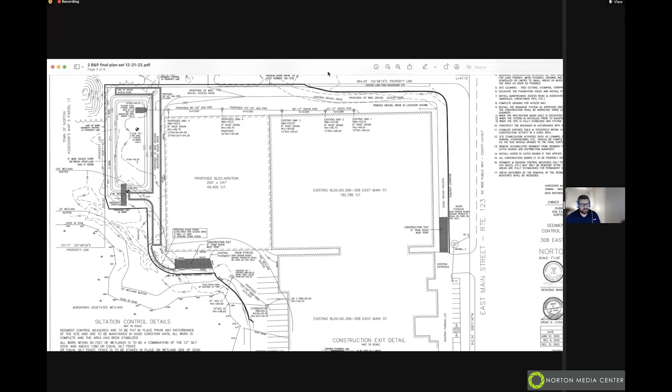There was nothing, everything was signed off in regards to compliance. It was just some suggestions applicable to the commission. So per the peer reviewer's recommendations, with conditions that could be included in an order of conditions, it appears the stormwater peer reviewer was comfortable with the project as a whole. Is that correct? Correct. So this is the letter here, dated December 23rd.

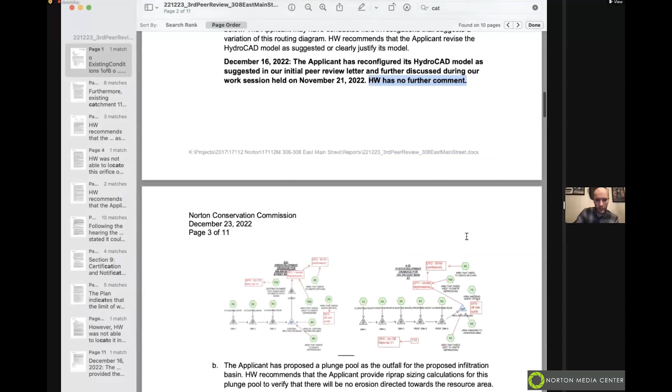No further comment here. Right. We don't need to go through all of them. I just want to make sure the commission hasn't forgotten. So again, there was no further comment.

So here's a special condition about the O&M. John, you did see that signed O&M. This is an operation and maintenance plan that encompasses the entire property as one document, signed by the owner, to be implemented by his designee. They're already aware of that, and Horsley Witten Group reviewed that O&M and were comfortable with it as proposed.

Exactly, and that was the main concern, the main comment from the commission, about the O&M, which has been reviewed and signed by the applicant, reviewed by peer review, and signed by the applicant. So as it pertains to stormwater, I'm of the opinion that all these matters have been addressed.

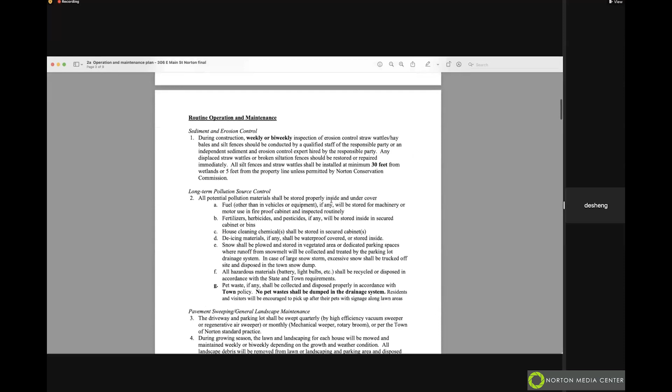If I may, John, there's one last email we received yesterday from Jenny to Megan. We sent out the standalone operation and maintenance plan, and she reviewed it; she's okay with it. The applicant, Larry, is also on this meeting, so he received it and signed it. They have the standalone O&M plan, which will be implemented both during construction and post-construction.

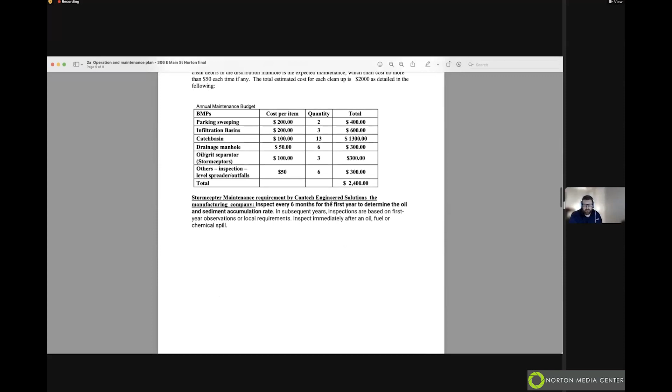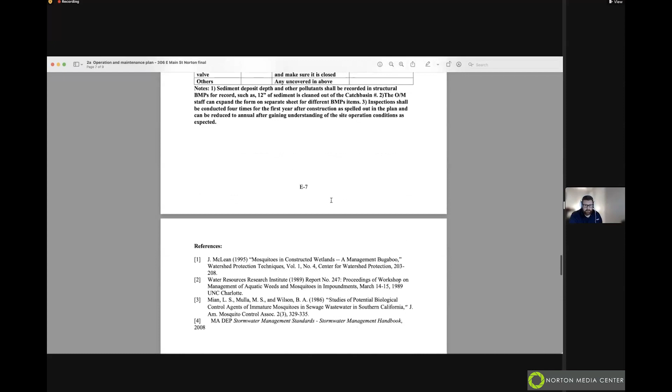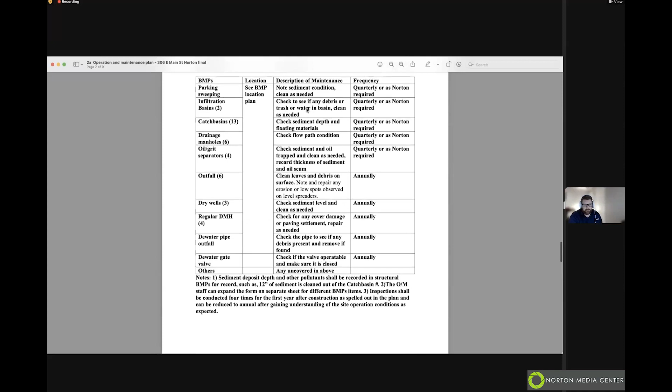So as it pertains to the stormwater handbook and the local stormwater management bylaw, it seems this project meets all that criteria. Yes. Therefore, I guess the concern for the commission is whether there are any other outstanding Wetlands Protection Act concerns, which I don't see any of as it pertains to my assessment or review, but if the commission has questions or anything else to discuss, they can do so.

All right, that opens it up to questions from the commission. And if we don't have any questions from members of the audience, and if we don't have any, I heard a recommendation for a motion to close.

I'll make a motion to close. What file number is this? This would be file number DEP 250-1114. Yes.

And a motion made by Tama, seconded by? Second, seconded by Lisa. Roll call vote. We're looking at Lisa and Ron. Aye. And Tama and Mark. Aye. Aye. And Dan has got to be here somewhere. Aye. There we go. All right, and I'll throw in an aye.